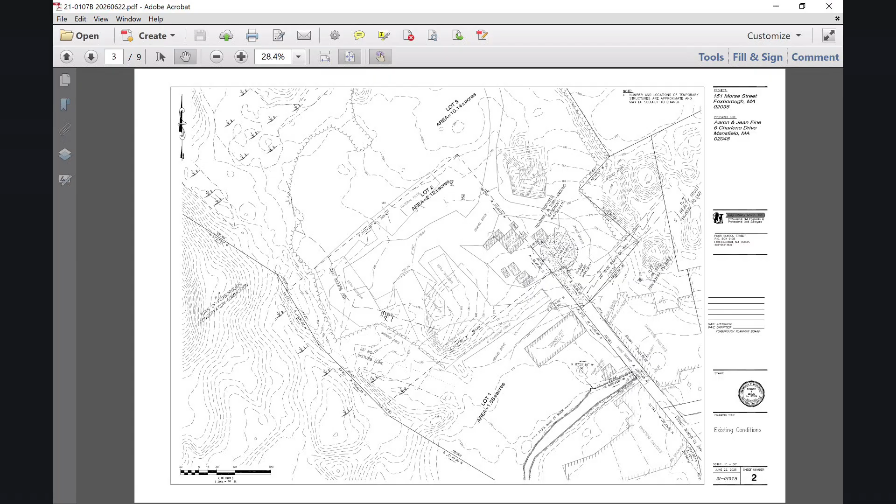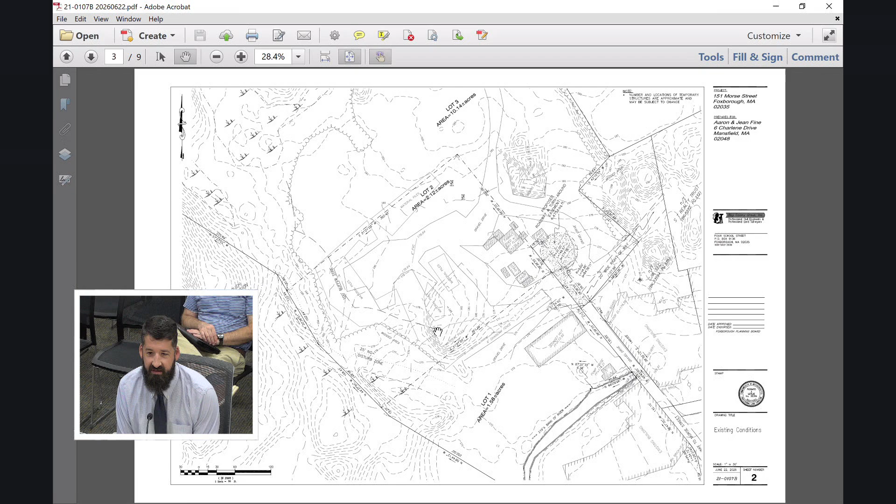So I can kind of trace it with my mouse here, that's the 100-foot buffer zone. This project had to go before the planning board for site plan approval, and part of that approval is we need to provide a 10-foot wide buffer strip, which could be landscaping, which is what we're proposing. That will result in approximately 390 square feet of alteration within the buffer zone, and it'll take place about 61 feet from the wetlands at its closest point.

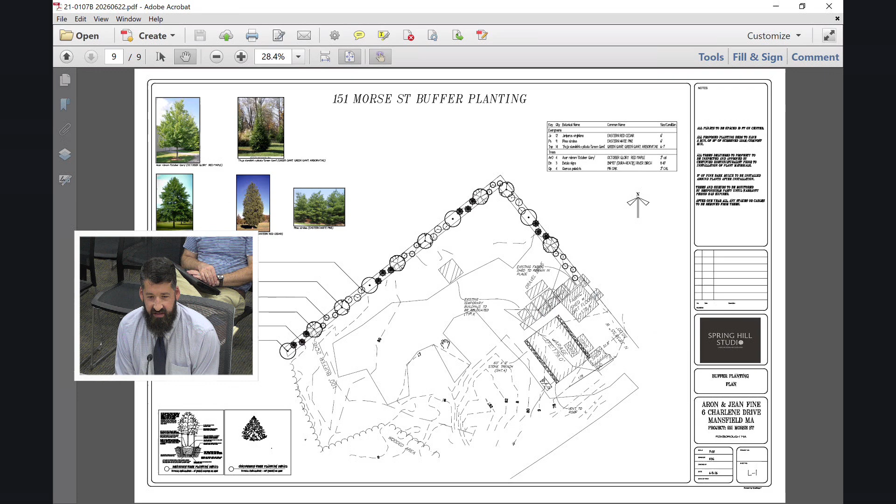The computer seems to be going a little slow, but we also prepared a planting plan as part of this project. We went out and reviewed the site, I went with Dave and Craig. We looked at this site, currently functioning as a landscaping contractor's yard, so there's a variety of material piles out there as well as temporary structures. This site is an active site, definitely, so he's always moving stuff around.

But this garage is going to be permanent, and then those temporary structures may move around periodically. But what I'm here to discuss is essentially just the plantings within the buffer zone in order to do our buffer strip. We went before planning board on the 23rd of July, and the project was approved. With that, I have nothing else to add.

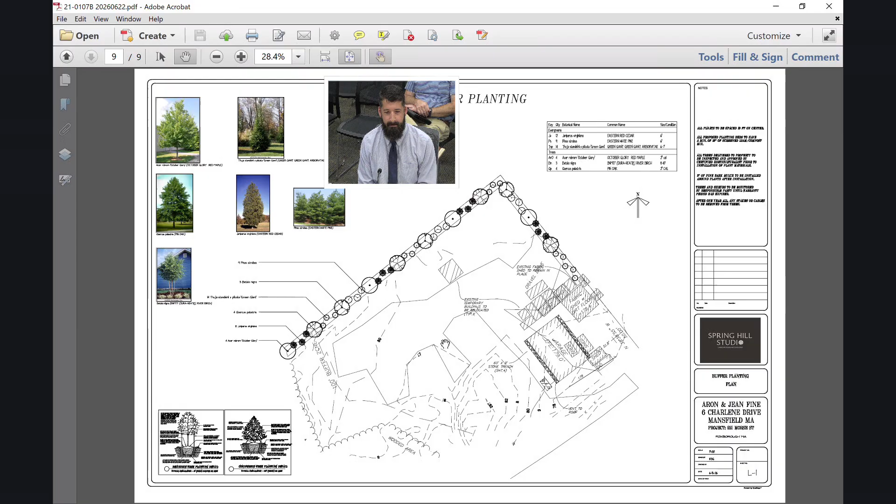I drove out, but I wasn't able to get out and inspect the areas. I know you did the site walk. Yeah, Dave and I went out. It was a heavily disturbed site, and I believe this is just for about 4 or 5 trees that will be planted within the buffer zone. So I don't see there being any alteration to the wetland, and again, it's in a very compacted and disturbed area. So a positive change, if any.

Dave, any comments? No. If you can see it in 2 years from now, it'll be something, because of the piles out there. Yes, yeah, I know. Any other questions or comments? No, it seems like a net positive.

I'll make a motion to issue a negative determination, number 2. Second? Discussion? All in favor? Aye. Opposed? None. Thank you.

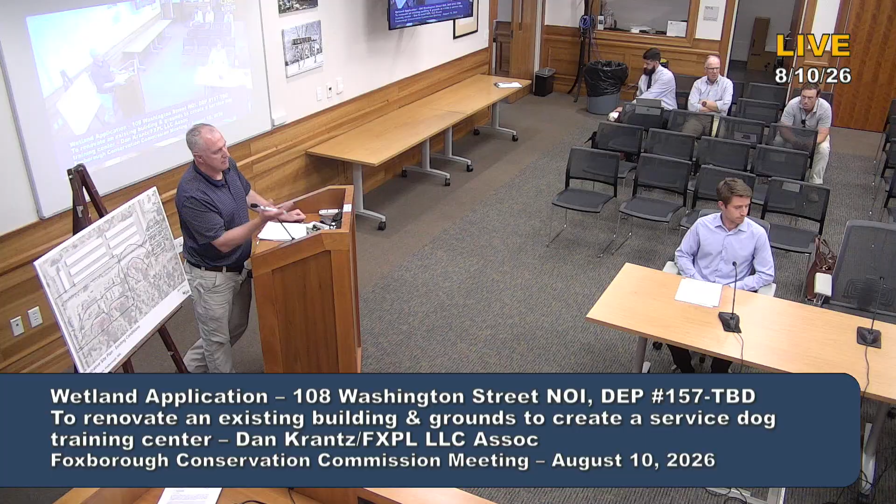So we're here tonight for a project located at 108 Washington Street called Pawtriots Facility. It's a training facility for service dogs for veterans.

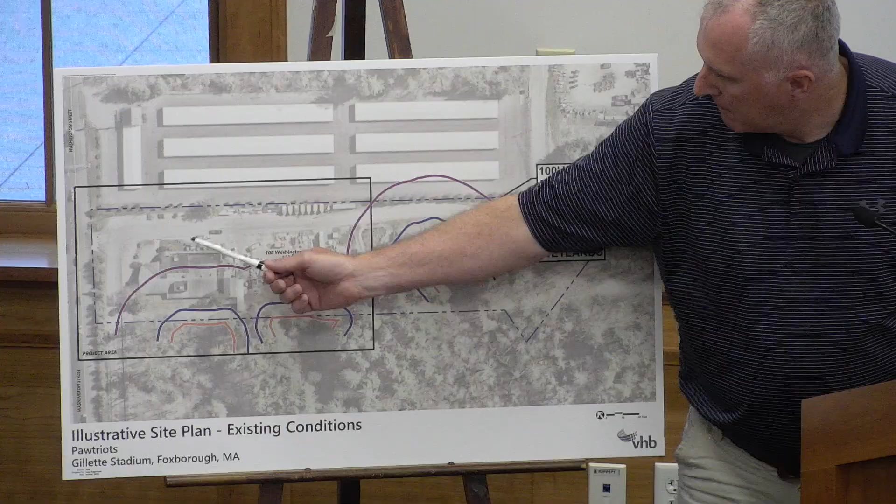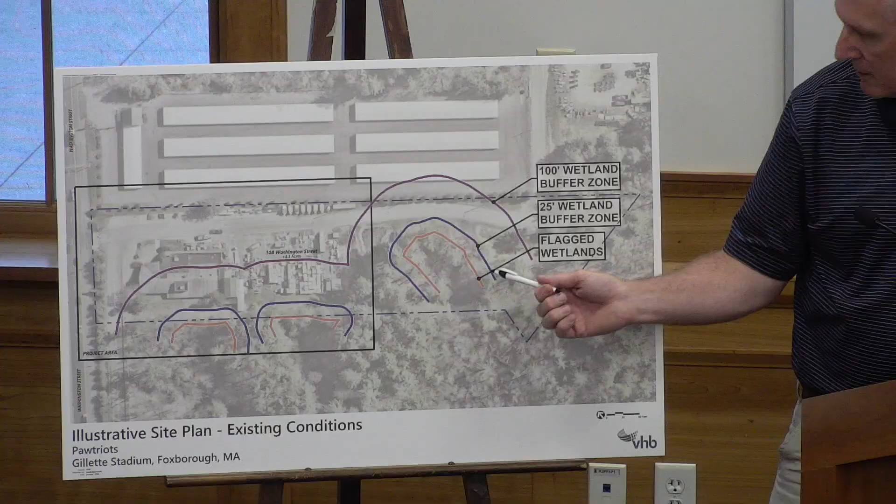The existing site conditions consist of an existing structure, an access road that swings around. This is the self-storage building, and there's a large parking lot area that's got a lot of material just stored there currently. There are 3 wetland resource areas, as you can see here. These all generally flow towards the south and kind of merge together. We've got the 25-foot buffer zone and then the 100-foot buffer zone here.

The project consists of redevelopment of an existing 4.3-acre site. The building will be renovated - let me switch to the next sheet here. The building will be renovated with an expansion area here. This area of existing pavement will be removed and converted to lawn and landscaping.

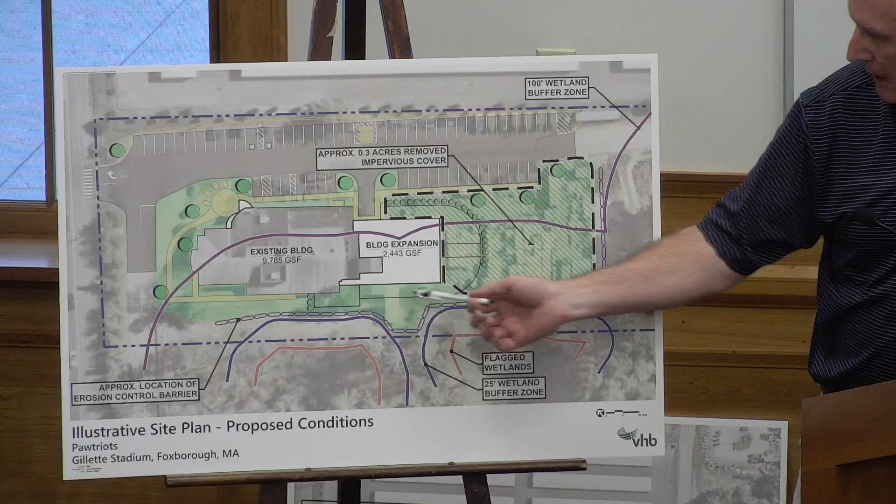There'll be a fence installed so that they've got areas for dog training through here. In through here, there's going to be a smaller, segmented fenced-in turnout area for dogs that will have a synthetic turf material surface. We're also proposing realignment and reconstruction of the sidewalks and some grading in this area.

We did receive a Mass DEP file number late this afternoon, 157-0677, for the project. I know we had talked at the site walk about that. I wanted to thank the commission members and the agent for coming out earlier today to conduct a site walk where we walked the site and looked at these wetland resource areas towards the rear.

Based upon the site visit, the agent asked that we address a couple things. There were a couple arborvitae, 3 arborvitae located here. Craig asked if we could switch those from arborvitae to a red cedar, which would be a native plant species. We don't have any issues with that.

Another comment he raised, which is a good one, is to install an orange construction fence to prevent any encroachment into the 25-foot buffer zone. There's generally a berm along the slope here so that any water generated from the site flows down into the existing stormwater system. So that will be an added feature to prevent any encroachment towards those wetland resource areas.

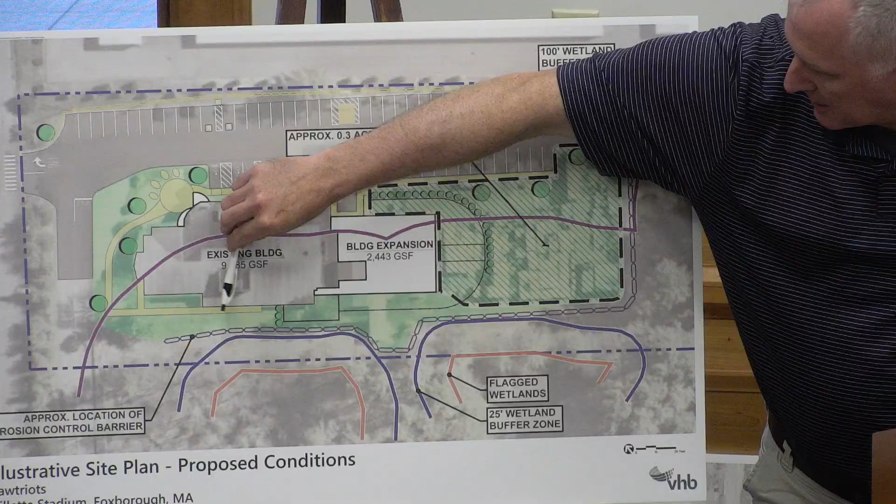So a considerable amount of impervious surface given the site conditions. And again, everything will drain - there's an existing stormwater system that was designed and permitted in 2014. So all that will remain in place, and essentially because of that berm, any flow will sheet flow into those stormwater basins for pre-treatment and treatment before any discharge. So I think that's a pretty good summary of the project. I'd be happy to answer questions if the commission has any at this point.

Are you happy, Craig? Yeah, before the site visit, I had quite a few concerns and questions, which I shared with the commission. But at the site visit, we covered them all, and I feel like they were all addressed.

With that, having the operations management plan sent to us, I do think should be a condition of this. A condition, yeah. And that can be shared at a later date.

Any other questions, comments? So the area where the parking lot is now, what is that going to become? This area is currently parking lot. They will leave spaces for some cars, realigning the roadway a little bit, but the remainder will be removed and converted to maintained lawn. Grass, yes.

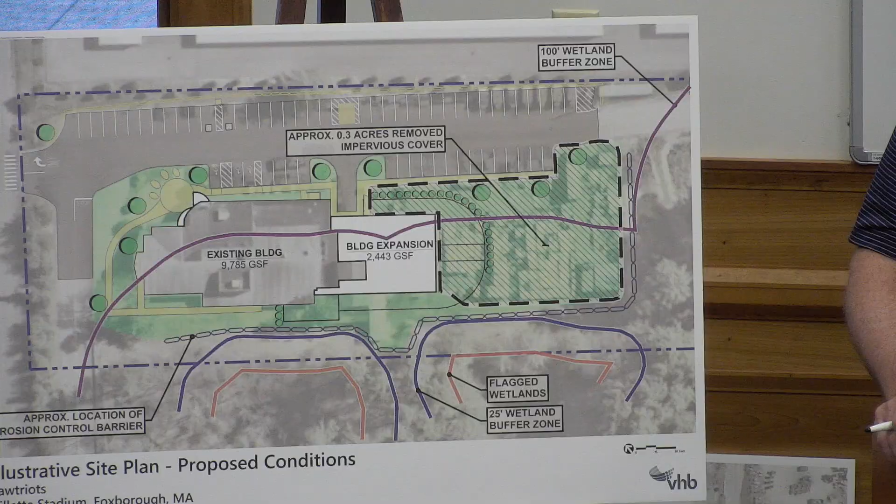Any other questions, comments? Any questions from the audience? Okay, I will make a motion.

I'll make a motion to close the hearing on 108 Washington Street. Is there a second? Second. Discussion? All in favor? Aye. Opposed? None.

I'll make a motion, order of conditions, to issue an order of conditions for 108 Washington Street, subject to Board of Health, with the O&M plan to be provided, revisions to the plan for the different trees, and the addition of the orange fencing.

Second? Discussion? All in favor? Aye. Opposed? None. Thank you very much.

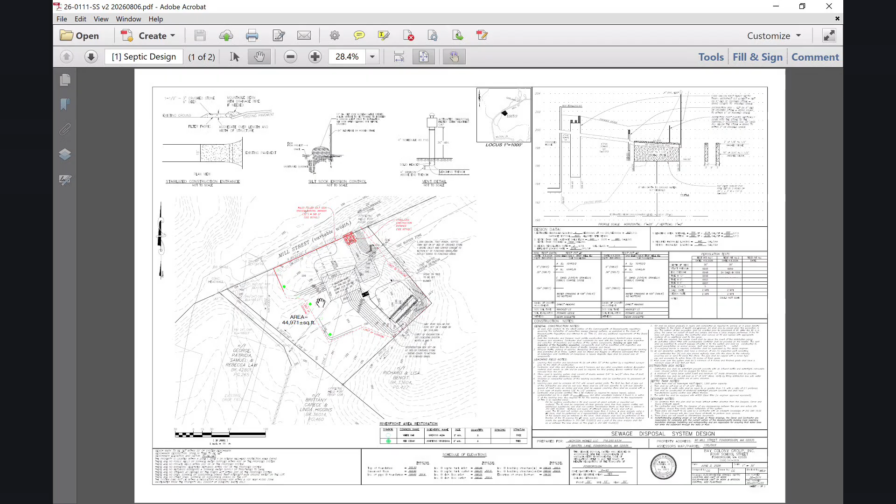So we went back, and if I could share my screen, I prepared a revised plan. So we went back and reviewed the plan.

A lot of this area I need in order to maintain the existing topography and tie into it in order to construct this project. But I was able to review the backyard area and bring in the limits essentially of the backyard, resulting in about 3,700 square feet less of backyard area. Then I tied into the slope here and tied into the slope up here.

I also proposed a few trees along this limit of work here. Since this is an unavoidable disturbance that we're going to be conducting in this area, some plantings will help mitigate that. With that, we really have nothing else to add.

We were able to go out and do a site walk with Rebecca, Mr. Bodie, and Craig. It's a unique site with varying topography throughout it, and it just took a little bit of design for us to make this project work while maintaining the existing grade around the site.

Trying to remember the wording - it needed to show that it met the performance standards to the maximum extent possible, I think. You mentioned we reduced that lawn last time, realistically as much as you could, and then adding the trees and some more erosion controls. I do think that meets the standards, because with that topography, there's not many other options for that site.

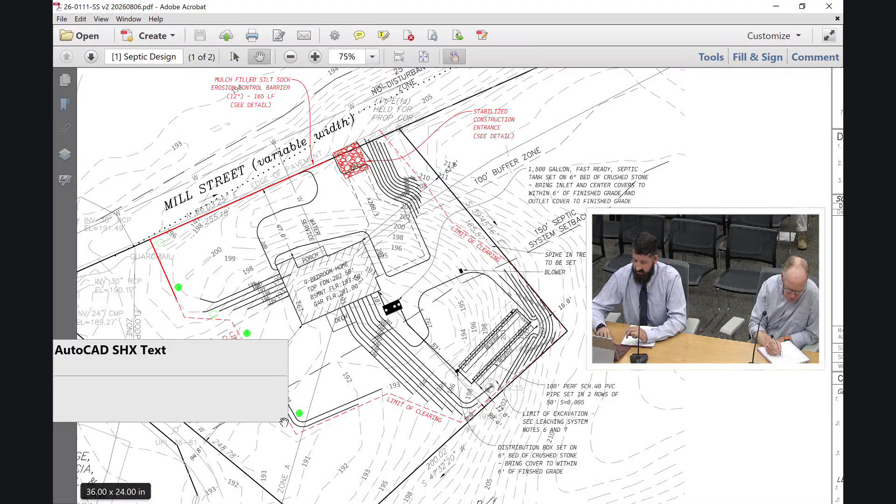Again, minimizing the loss in the riverfront area, trying to get some native growth on these disturbed areas - it's part of the alternative analysis. This back area is basically at the limits of the 200-foot riverfront area. I felt the plantings were a better use down in this area since it's towards that drainage ditch, where there's going to be a little bit of flow going back that way.

What do you think, do you want to condition it? I think you should come up with some alternative natural ground cover plantings there. They don't have to be maintained - they'll take over and hold that slope. Native plantings. So would a certain native seed mix be acceptable? Yeah, a native seed mix - you could propose that.

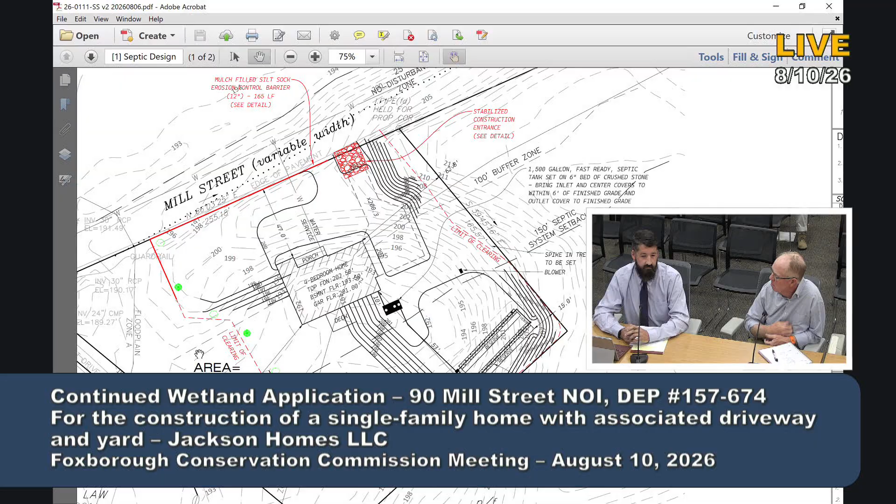I assume you're going to have regular grass on the other slope on this side of the lawn area. Is that going to be native grass? Are they going to be able to mow that steep slope? These contours are a 3-to-1 slope, just 1-foot contours so it looks busy, but the intention was to maintain it as all grass in that area.

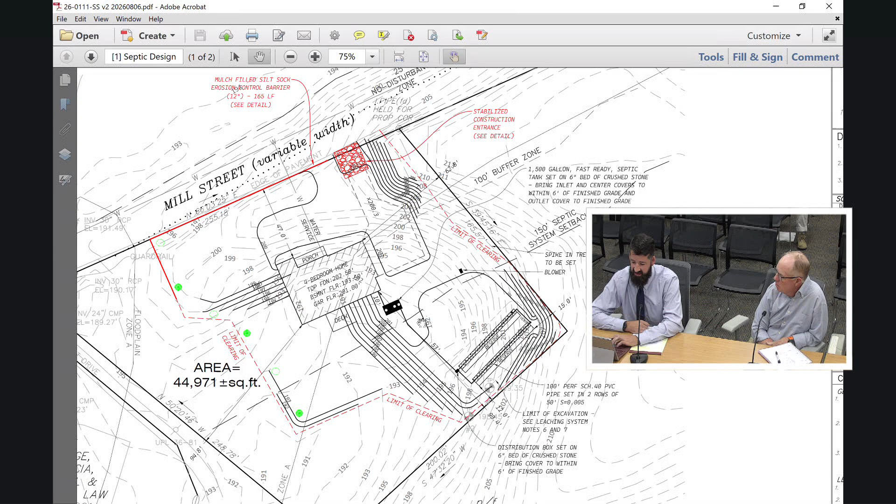Anything else? You guys have thoroughly reviewed the site. You all set, Craig? I don't have anything else to add.

Okay, close the hearing. I'll make a motion to close the hearing on 90 Mill Street. Second? Discussion? All in favor? Opposed? None.

Got an order of conditions that - with the extras in there? Got it right here. The hearing was closed - did you want to make a motion to issue an order of conditions? Do you want to see that revision on the plan? Yeah, I'll make a motion to issue an order of conditions for 90 Mill Street, provide a revised plan showing the...

It's not going to be plantings, but the seed mix used on that location - along the area, I don't have a plan for it, but you know where I'm talking about, southeast corner, rear of the southwest, over by the septic. Second? Discussion? All in favor? Opposed? None. Thank you.